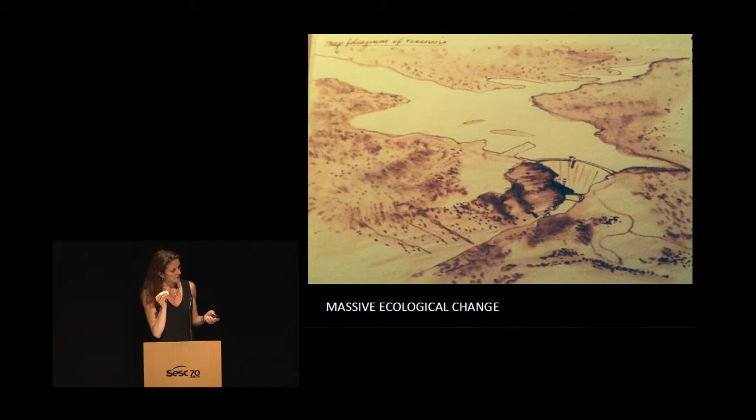An important aspect of the TVA is that water, landscape, and infrastructure have been an obsession of mine for years. When I was 14, my father, who was a geophysicist, took me on a field trip to this landscape in the Southwest. When I was at Harvard studying landscape architecture and architecture, I got a grant to go back and look at these large water impoundment structures, thinking about the ecologies and the differences between the landscapes on either side of these large dams.

A lot of my practice focuses on the term infrastructure. Infrastructure as a term developed in the World War II era, in reference to military logistical operations, largely through the work of General Eisenhower, who then became President of the United States. He was an important military general, and he created the federal highway system, investing $25 billion into our national highway defense system. It was very important that it was called the National Highway Defense System, because that was how he could get the political backing to make it happen.

One of the things that's very important to think about in relation to this is it transformed the distribution of people across the country. It was actually a very significant development scheme that really led to the development of the suburb, and a lot of this post-war development that we unfortunately see across the United States today.

Unfortunately, there are also representatives, congressmen and politicians, who still consider this about economic development.

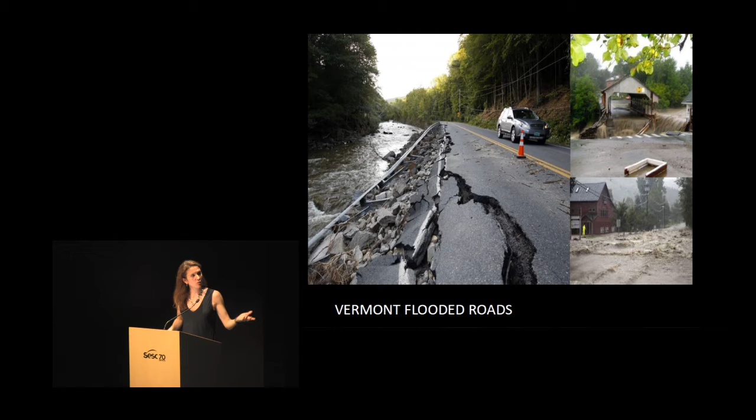One reason we think that's important is that I'm actually from Vermont originally, and a lot of our infrastructure is located adjacent to water systems. When it fails, we can have disastrous consequences. So I think we need to rethink how we consider infrastructure.

This is a competition we did for rethinking the whole urban structure of Montreal, but ultimately it's about thinking about the systems that created that city. We were asked to create a connection from the airport to the center of the city, and we decided to think about all of North American infrastructure.

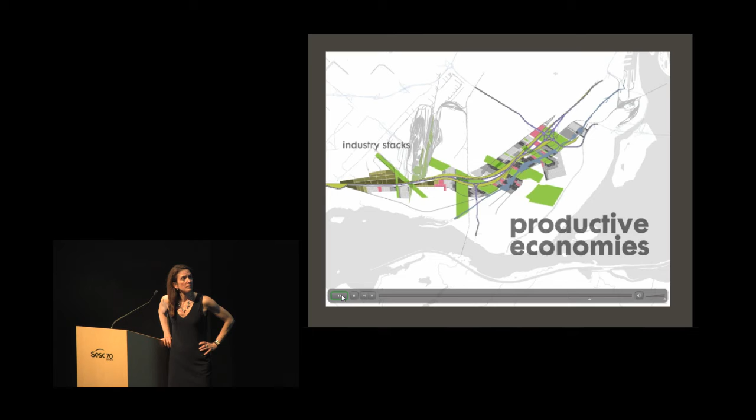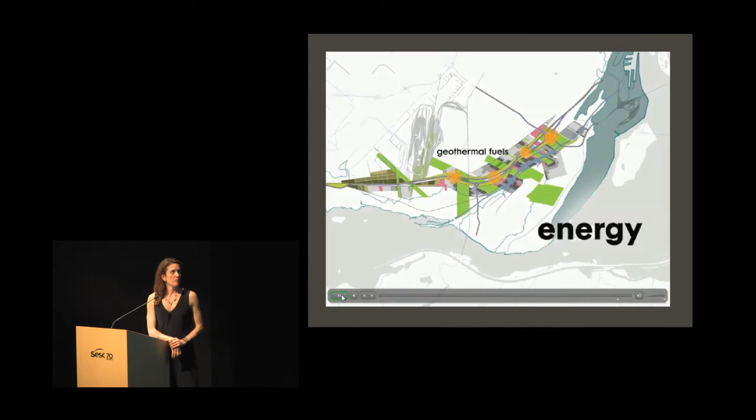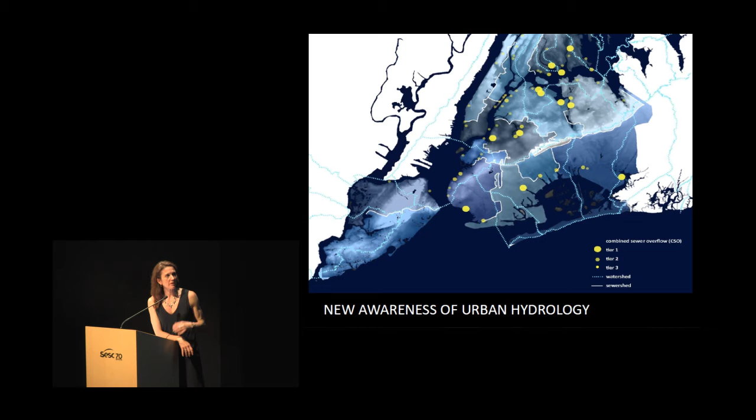We were trying to restitch the city back together with this project we called Infrasutures. It's relatively easy to do that in an animated cartoon, but now I'm going to show you how we've been doing that in New York City. I think there's a new awareness of urban hydrology.

I think that's happened in part because of the extreme climate impacts we've had from large storms, but it's also, happily, because of major changes from legislation signed by Richard Nixon.

In 1972, Nixon signed the Clean Water Act and the Clean Air Act, and he also created the Environmental Protection Agency, or EPA. Those agencies and acts have enabled a lot of the work that I do.

The other really important player in the work I do is Mayor Bloomberg, whose PlanYC proposal, a big document of guiding principles for the city of New York, helped inspire and motivate public agencies to pursue some of the projects I'm undertaking.

With that, I'm going to begin talking about some of my projects. There are 772 U.S. cities that have combined sewer systems.

Thomas Crapper did not invent the flush toilet, but he was a plumber who popularized it. Because he popularized the flush toilet, which used a lot of liquid, it ended up putting a lot of additional effluent into our sewer system. And so the combined sewer was born.

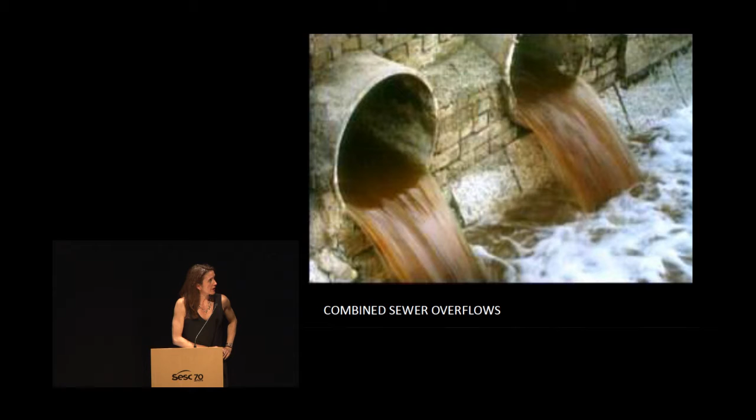Normally, sewage from domestic, commercial, and industrial sources is treated by a sewage treatment plant. But when too much water goes into the system during a wet weather event, the combined effluent goes into the waterways instead.

So what I'm trying to do with this first project is actually absorb that water. This project is called the Sponge Park, because we're using the landscape to absorb water.

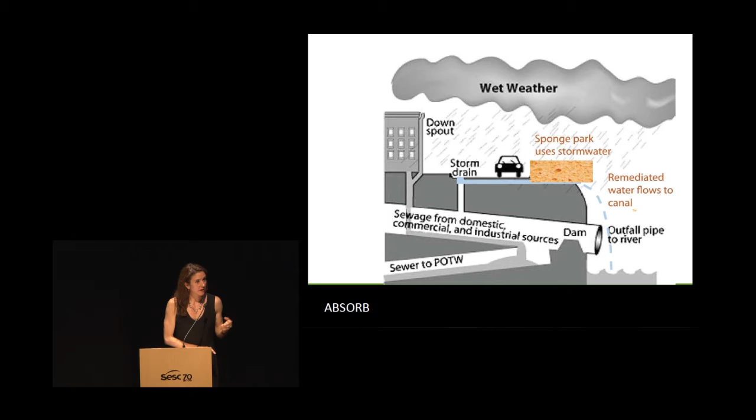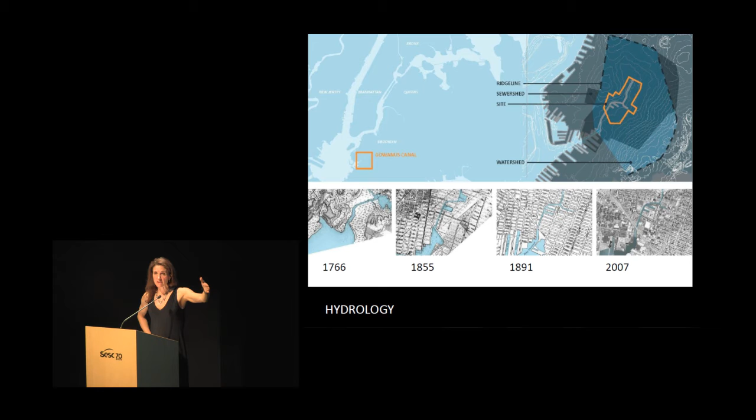So this project is in the Gowanus area of Brooklyn. Gowanus is now cool—it wasn't all that cool when I started. You can see that in 1766, the whole area was a swamp, and it was transformed over time into an industrial landscape, and now it's really a post-industrial landscape.

So what we want to do is bring back some of that absorptive quality of the swamp to what is now a very paved landscape, and create the Sponge Park.

So we work on a lot of global issues, but we do our work through small local pilot projects. In that way, we create replicable systems that, when replicated on a large basis, can have a big impact. We do the work in a unique way: applying for grant funding to get projects going, then creating the drawings, facilitating the construction, and even creating maintenance manuals for the long-term stewardship of the projects.

For the Sponge Park, it was entirely grant funded, and it was something the public agencies weren't excited about pursuing initially. But ultimately they kind of had to, because so many community people were for it, because we had raised all the money, and because it was a pilot project.

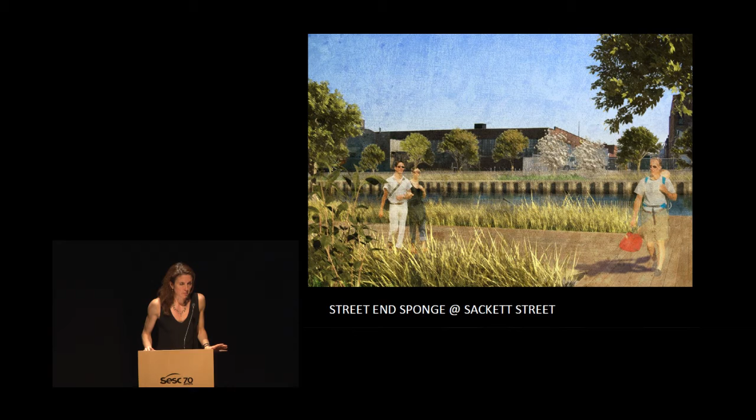That was very important for the boating community—believe it or not, there is a boating community on that cesspool. They wanted to be able to get out of their canoes at each of the street ends, so we left those open.

When you're working with an industrial site, one of the things that's significant is that the buildings often go all the way up to the water's edge. City planning during the Bloomberg administration liked to create waterfront esplanades, and they tended to be at the water's edge with a 40-foot setback from the water.

In that space, you were intended to have pathways, benches, and trees, but it didn't really say what do you do if you have a building in the way and it happens to be an industrial site. So what we did was rethink the idea of the waterfront esplanade and create what we called an urban promenade.

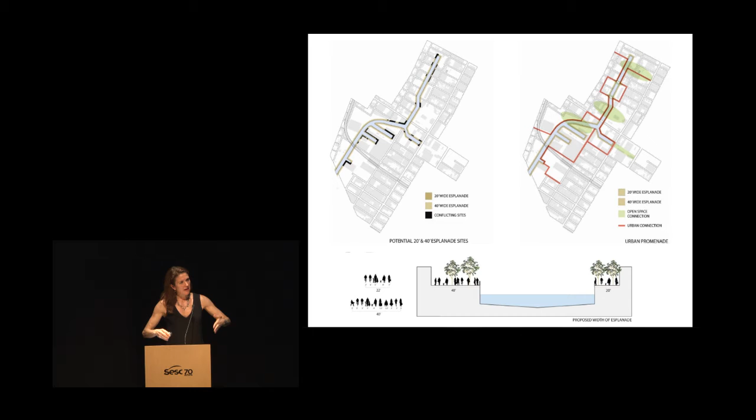We liked it because what it did was take the pathway and kind of knit it back into the community. So it doesn't just add value to the water's edge, it adds value to the entire neighborhood, creating an entire green district with these green infrastructure systems knitting into the urban fabric.

Here you can see how that could transform the neighborhood. We added about 6 acres of permeable ground and public open space to the city, not including the actual street beds, which would be these new, important public streets.

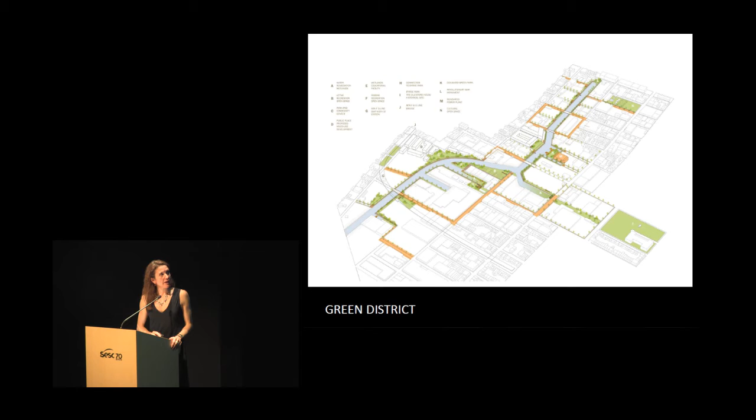One of the things I want to point out about working in the city is that it's really complicated—I know it's complicated here, it's complicated everywhere—but just to point out how complicated it is in this landscape: the sediment underneath the canal is controlled by the U.S. Army Corps of Engineers, but it became an EPA Superfund site in the middle of the design process.

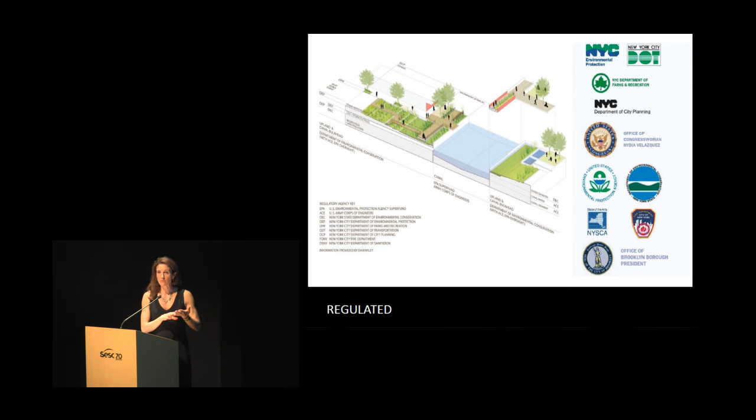The first 5 feet of soil underneath the upland area is controlled by the Department of Environmental Conservation, a state agency. The surface of the ground is controlled by the Department of Transportation because it's a road. Anything green is controlled by the Parks Department. And the water that flows over the ground is controlled by the Department of Environmental Protection. The shade over the water is controlled by the Department of Environmental Conservation.

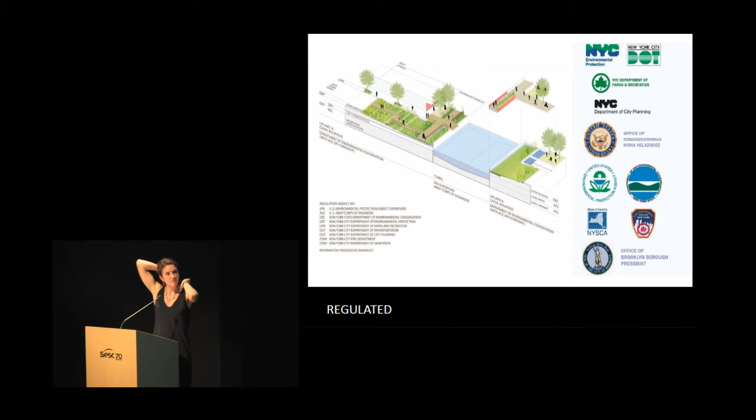City planning also regulates how many benches you have to have, how much shade you have to have. Sometimes the benches have to have backs. It's insane how regulated this environment is. I think there were something like 200 permits we had to get for this tiny little pilot project. And even within the Department of Environmental Protection, 14 agency heads had to sign off on our drawings. It was really insane.

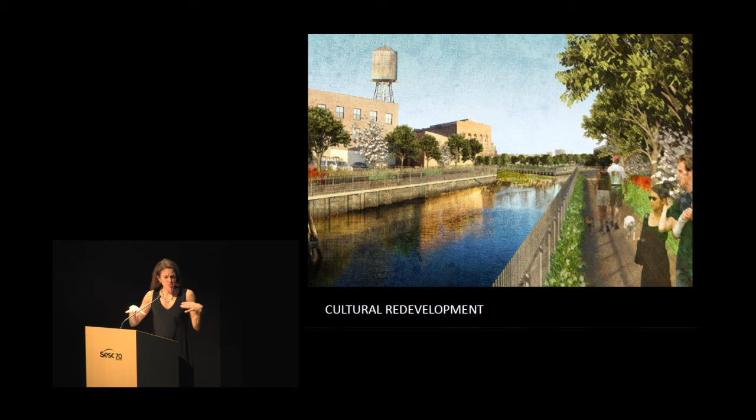But we're managing to get it done, and we're also working on a cultural redevelopment right across the way, which was part of our original master plan. So we're doing these pilots, and we're doing work for private entities to really transform this whole area. Now I want to talk a little bit about the pilot project for the street end.

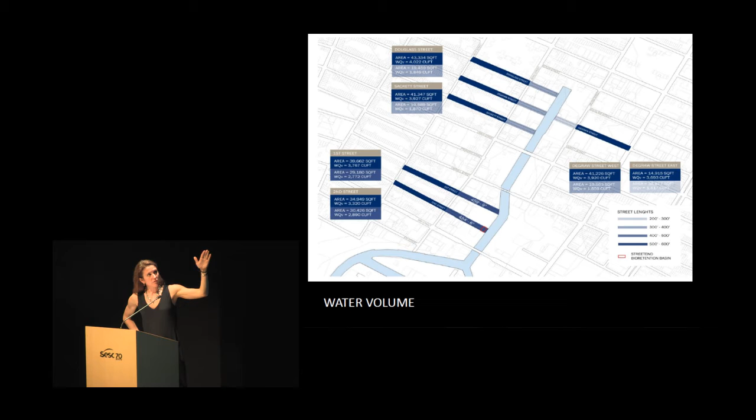So we calculated the amount of water going down to the street end. This is an animation of how it works, just a couple minutes, and it explains it most easily.

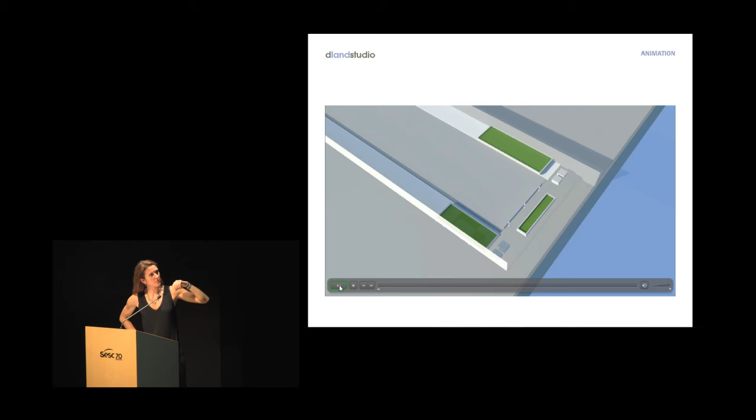So there were these existing planters, let's call them. They were called green streets at the end of the block. We're taking those out because those only took the water that fell into them. We added upland street swales, and we're also creating a system of bioretention cells. These are all precast concrete cells that are interconnected and planted, with very special engineered soils within them. There's an integrated sidewalk and sedimentation basin, and then a sand filter below a walkway, and then there's a drain.

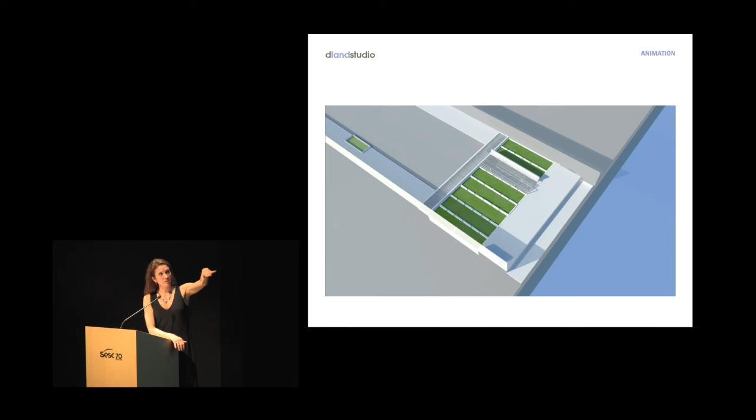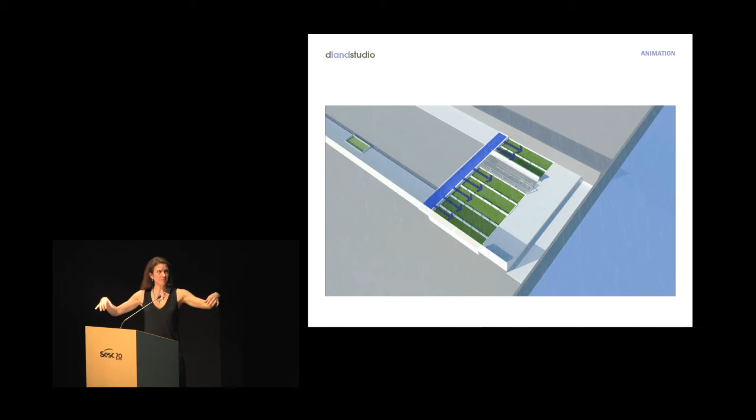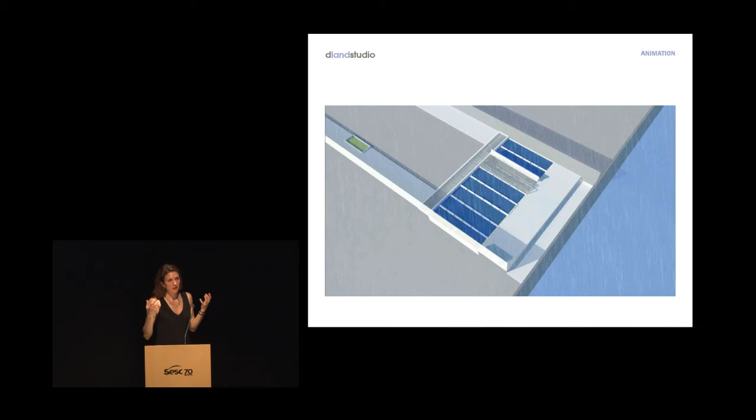So once it's gone through this whole filtration process, it goes into the Gowanus Canal. When the rain comes down, some of it is captured by the upland bioswales, and most of it is actually going into this sedimentation basin. That's really important because it takes out a lot of the fine silt. It's then distributed evenly to the cells, and when that reaches capacity, the plants absorb the water and the soil absorbs the water. If you get more than the 1.2-inch storm, which was the storm event we designed to, the water will go into the sand filter and eventually overflow into the canal, but that's after it's been cleaned.

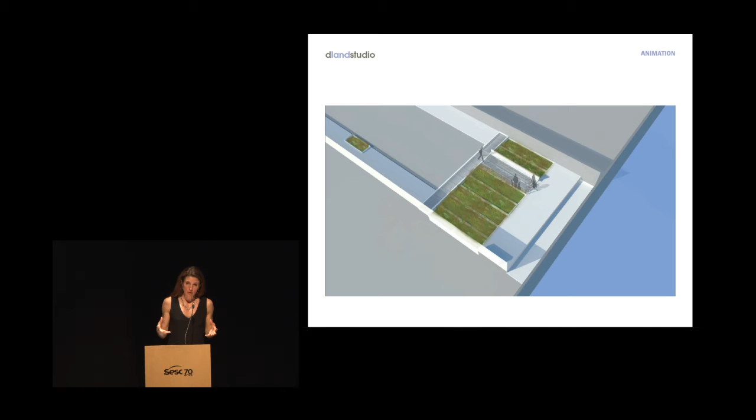So we used plants that have phytoremediative qualities. They can actually help break down the biological toxins in the soil, and they can also help absorb some of the heavy metals in the soil. We had specific plants that were designed, or selected, to do that, and it would create this whole new open space.

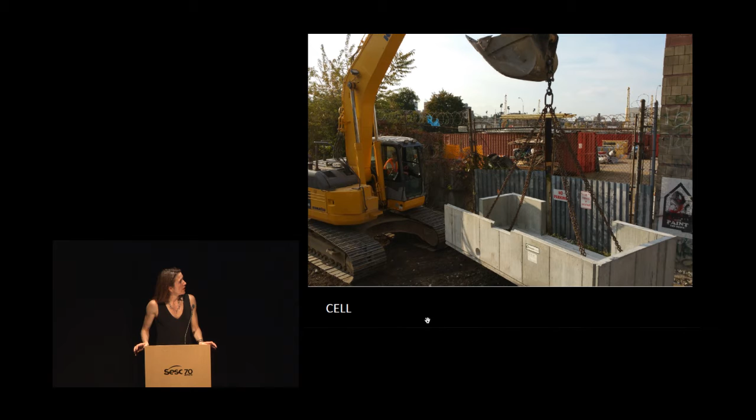So this is it in construction. You can see these cells are huge, it was really cool. We'll just go through these quick - here they are going in. We ended up taking out the walls in between them because we didn't need it, it was just extra material.

We're really excited because this actually captures 2 million gallons of stormwater every year, so it could really have an incredible impact. The Department of Transportation and the Department of City Planning are now looking at implementing this everywhere in New York City for every street end. So we've subverted the system, we've sort of worked around every agency, we've managed to get all of their approvals, and now we've created a new form of urban infrastructure for New York.

So architects can infiltrate the engineering community, right? We have the potential. It just takes a lot of time - I joke that it took 8 years of planning and 8 weeks to build.

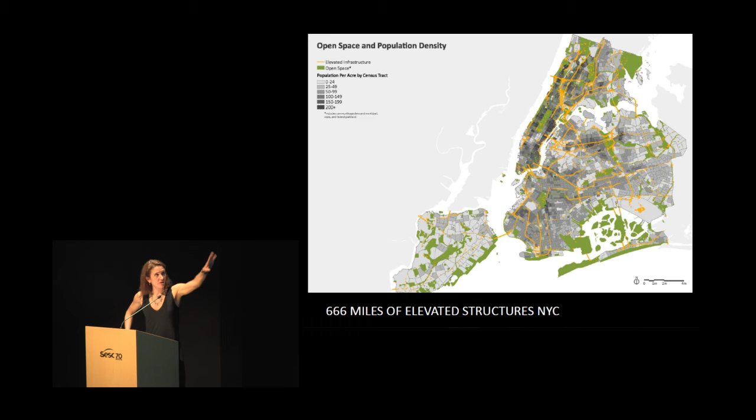Two years ago, I was the Design Trust's Urban Design Fellow, and we looked at these 666 miles and came up with a number of different typologies for how to transform these existing elevated structures.

We looked for geographic distribution across New York City, and then also looked for typological strategies—basically different operations for different types of things that could happen.

Clover was more of an ecological approach for the large cloverleaf, whereas Landing was really about the threshold to Chinatown. The Train project really had a lot to do with noise and managing those consequences. With Cluster, we had so many different forms of infrastructure coming together that a lot of the project had to do with wayfinding—how to make place out of this really disjointed area.

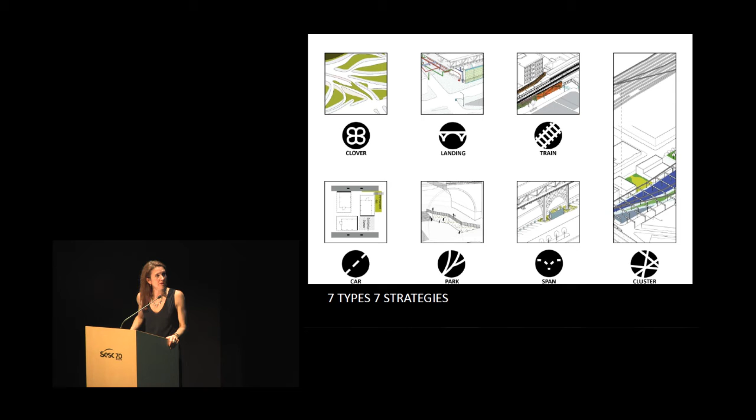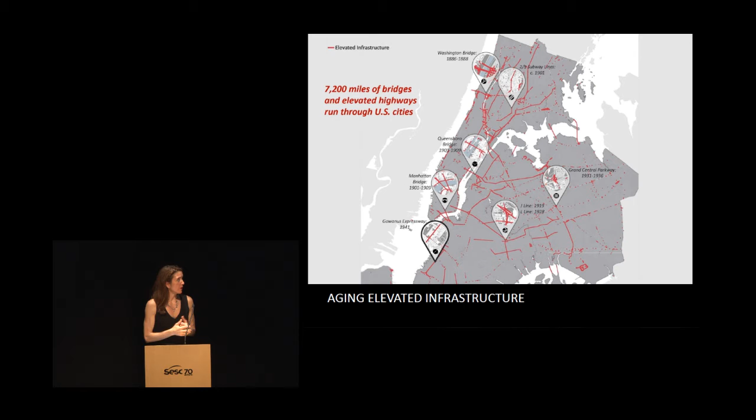We also looked at the age of the infrastructure, because that might help us prioritize where the public agencies might want to put their money and how they might want to figure out where they were going to operate first.

On the Gowanus Expressway, we had a particular opportunity of a very large highway next to an area becoming a new, exciting technology center. But it's also fairly close to the Gowanus, which is developing as more of a residential neighborhood, and it's displacing some of the light industry and art studios that exist there. So we felt a need, and we saw space.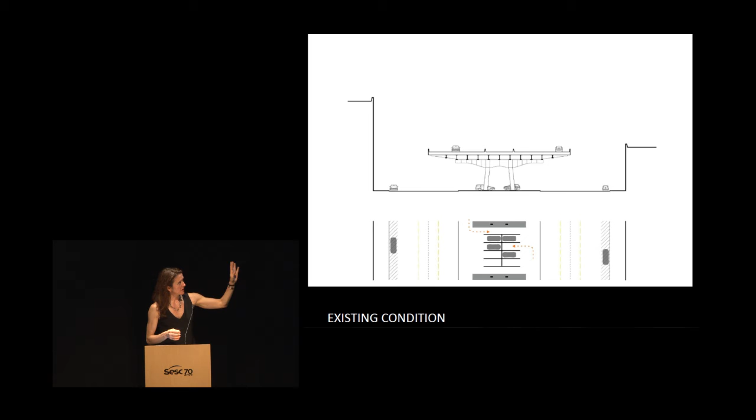So we thought, why not take the parking away from underneath this huge elevated structure, and maybe put in some green infrastructure, taking the water off of the raised highways—something I had developed in a prior project—and then also think about how this space could be used for light industry.

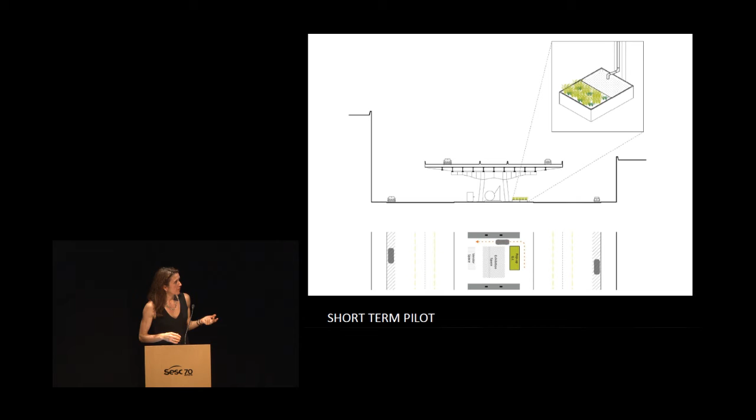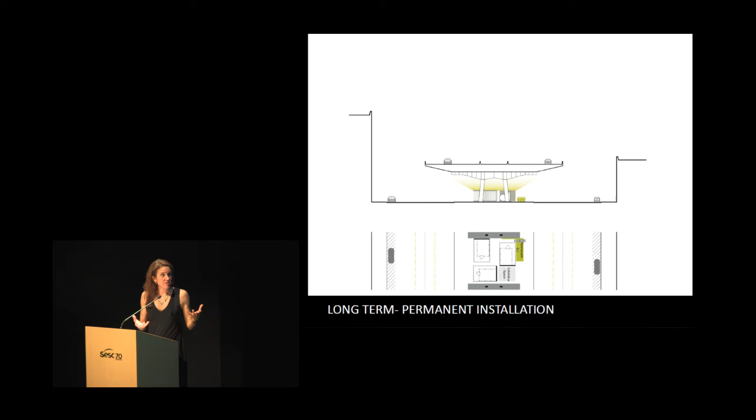It could be used for artist studios. It could be used for things where you have to make noise and make mess. And then it might have a longer-term life as a permanent installation with studios or even gallery space existing underneath the highway, because we have these adjacent uses of this industrial space that's becoming this new technology and art space right next door.

This is just an illustration of that under-the-elevated reclaiming of public space.

Over at Broadway Junction, which is one of the cluster projects that I talked about, what we were thinking about is how to really transform this space. There's a lot of space and it's quite beautiful with this very filtered light, but right now there's nowhere to occupy and you can't really tell where you're going.

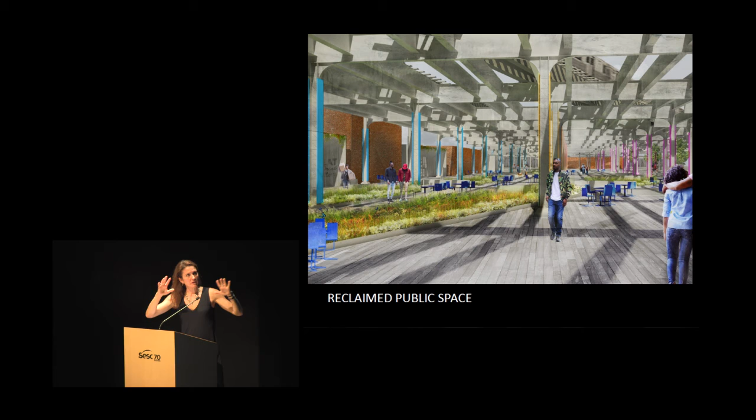So we thought about some of the strategies we could use to help understand what direction you're going in, using color, and how we could actually bring in some more green space and some more seating.

One of the big issues I was exploring—probably the reason I was chosen as the Design Trust Fellow—was that I was looking at the water that comes off of the raised highways. You can see this is the problem: this is not a natural water body, it's just a really large puddle, and there's nowhere for it to go. It's really kind of toxic water.

So what I want to do is actually take the water and put it into what we called a Holds scupper. There are these downspouts that come off the raised highways, and the water has nowhere to go. In some places, there aren't even catch basins.

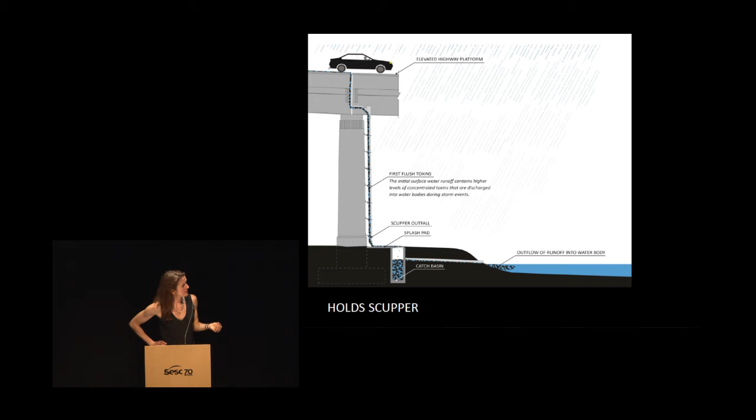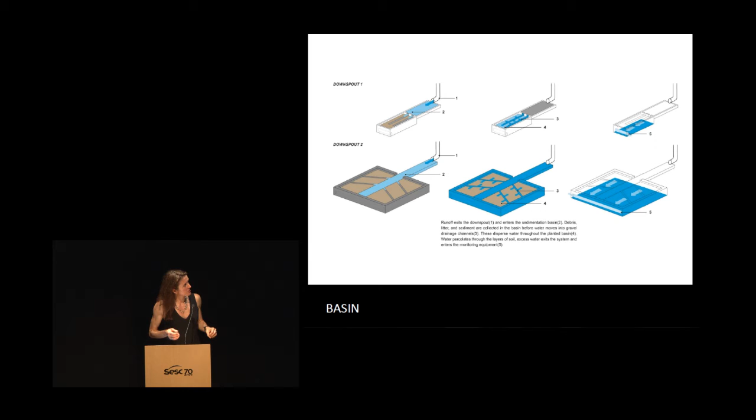So we developed a number of different typologies, and these are a couple: one is a sort of cellular technology using concrete, and this other one was made of gabions. In each case, there's a sedimentation basin, and what it amounts to is a large planting area.

But happily, there were some landscape architects on their staff who said, just let her try it. It's a pilot, we can always turn it back. And because of that, they let us try it, and it's actually working.

But unfortunately, when you create nature in the city, you create nature in the city. You create good habitat. And this muskrat moved into our green infrastructure system, our hold system.

And he moved into this big area that we had, it was a big concrete sort of cell that we had for monitoring each of the projects. For the Sponge Park and these hold projects, we're monitoring how much water goes in, how much water comes out, and then how clean it is going in or how dirty it is going in, and hopefully how clean it is coming out.

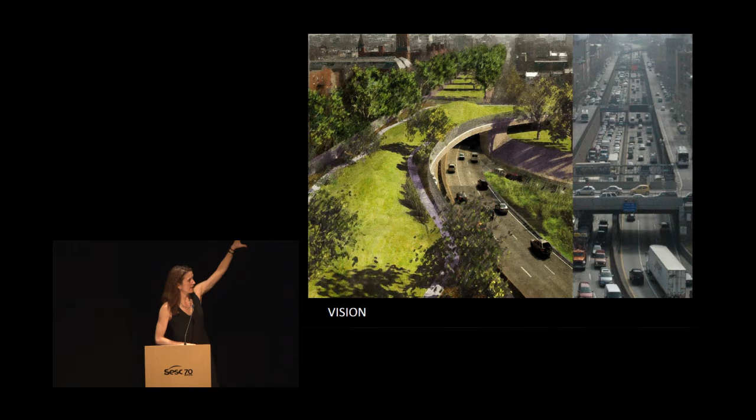And my vision when I started my firm had to do with Robert Moses's work on the Brooklyn-Queens Expressway, and trying to ameliorate some of those impacts by creating a large park in Cobble Hill and Carroll Gardens.

So I got a grant to look at this, and I studied the economics of even putting in, say, 350 trees, which I discovered would create a $50 million gain over 10 years in terms of pollution control, water recycling, and shade value.

And this was at a time when people weren't really talking about the value of landscape, or they'd only just started to visualize and quantify these things. We found this Forest Service document that had done this study and gave us the data, but it wasn't out there in the public realm. I'm happy to say that 10 years later, this kind of message is starting to permeate more of popular culture.

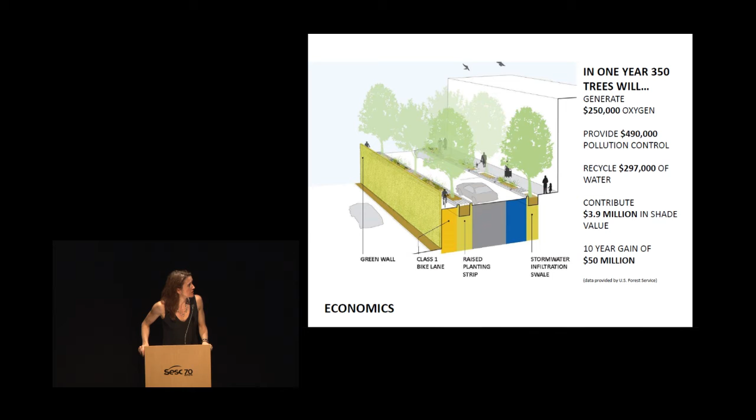But, back to Robert Moses. Some of the things that Robert Moses did early on were very good in terms of creating lots of playgrounds and open spaces for people of all economic brackets.

And oftentimes he would go into communities and present these beautiful parkways with park space on either side.

And these trenches actually create these physical boundaries. He not only created these highways going through, but also a lot of the bridges that touch down in the neighborhoods, all in the name of progress.

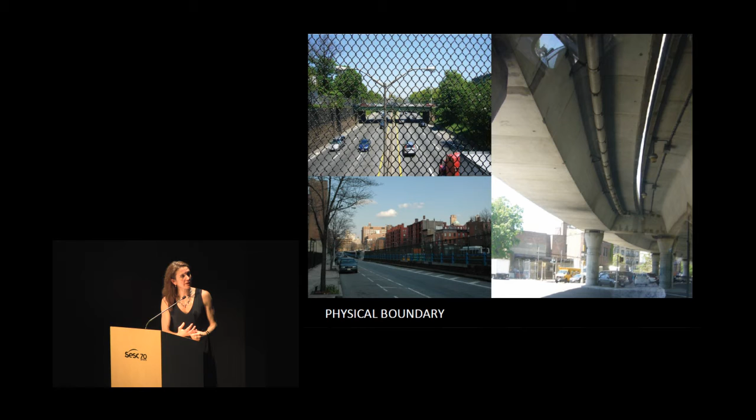So when I started, I was working in Cobble Hill and Carroll Gardens, which is on the bottom part of the slide.

And then that work got the attention of a councilwoman, Diana Reyna, who hired us to do a project in Southside Williamsburg, which is a primarily Latino neighborhood up in the northern part of Brooklyn.

So it's an area that's plagued, unfortunately, by gang violence, and the trench actually creates a territory between the Dominican gangs and the Puerto Rican gangs.

It's also an active recreation desert. You have to go pretty far to get to playing fields for your teenage kids. Thus, the teenagers end up in the gangs.

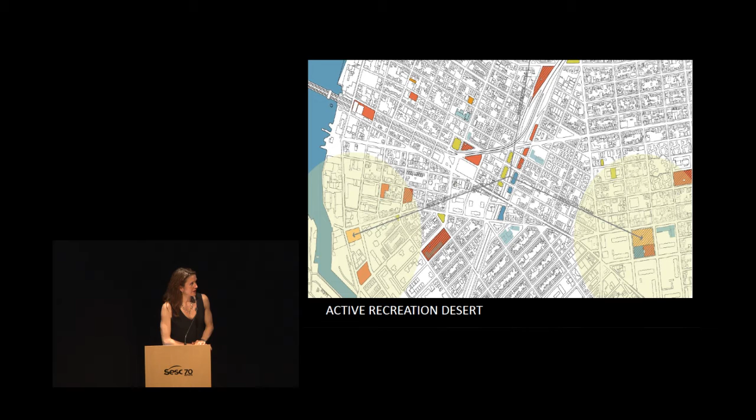And so we went through a very extensive community engagement process to develop a program for this park. This is Diana Reyna at one of the community meetings.

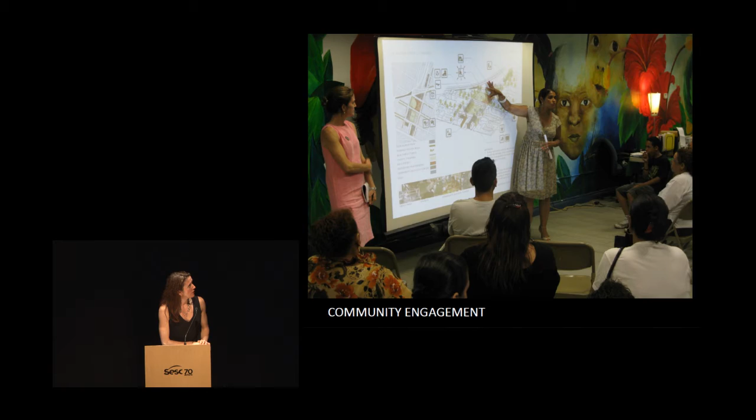What the community told us was that they really wanted playing fields. So we ended up designing a baseball field and then a flexible area that could be a soccer field between the two fields, or if you used both fields. Then some more lush landscapes on either side, and we kept some basketball courts and some play areas, creating this whole kind of verdant cap for the highway.

This is done in lots of parts of the world, but it's been kind of hard to get it done in New York City because it takes a lot of political will to make something like this happen, and the political will tends to happen in more affluent neighborhoods, not in Southside Williamsburg. But we're trying, and so we looked at the feasibility of this in terms of the spans.

What we discovered was that we needed to keep the deck actually fairly thin. So the program we had proposed, putting the field turf over the center portion, was actually ideal because it doesn't have a lot of weight, and so we could keep the structure fairly thin. Then in those zones, we could touch down in the center with an intermediate structure, which meant we also didn't need such a thick structure.

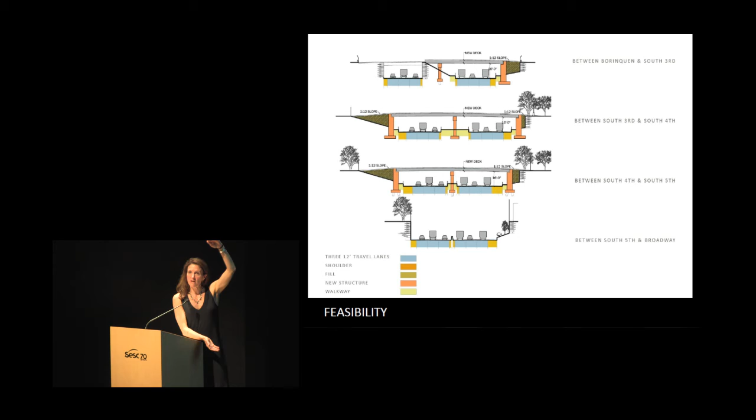This was important because we had to bring the project up to federal highway standards, so we needed 16 feet of clearance. We also looked at the construction of the BQE and saw it was done in phases, and we recognized that this section of the BQE was built in 1950. Now, these highways generally have about a 50-year lifespan, so it's time to rebuild a number of the bridges.

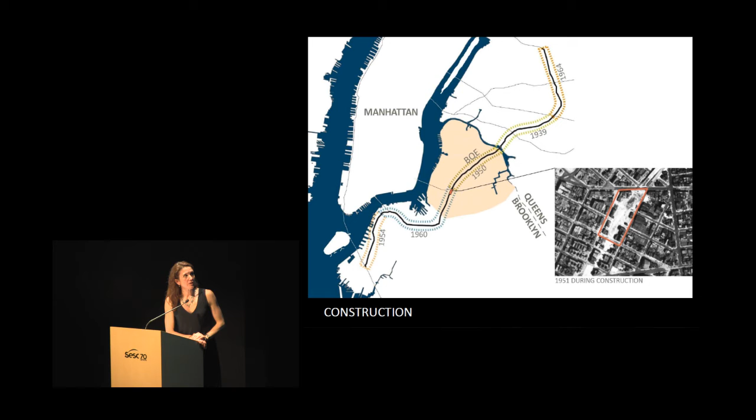So we thought we could create an enabled economy. Basically, each of these bridges costs about $10 million to rebuild, so we thought we could rebuild those bridges, each for $10 million, a $30 million city investment, and then use that to leverage against a $70 million federal, state, or private grant fund. So that was our idea for this enabled economy as a way to make this happen.

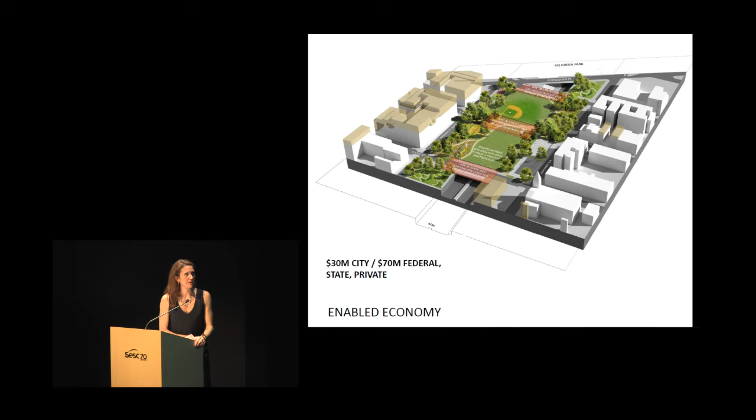So we'd turn this passive open space into a more active component of the community. There are 20,000 miles of rail trails in the United States, and the Queensway is adding another 3.5 miles. This is a project we're about to start, but the work I'm going to show you is from a feasibility study we did in partnership with WXY, an urban design firm, two years ago.

We did this work for the Trust for Public Land and an organization called the Friends of the Queensway. We're adding 40 acres, actually 47 acres, of new park space to New York City along this 3.5 mile long linear park.

So the park has a lot of different characteristics along its length. On the northern part, we're creating something we call the clearing. Then we have these areas we call passages, because they're houses very close to the Queensway, and we want those to be places people might move more quickly through. Like if you're on your bike or jogging, we don't want people to linger there, so there isn't a lot of program space in those zones.

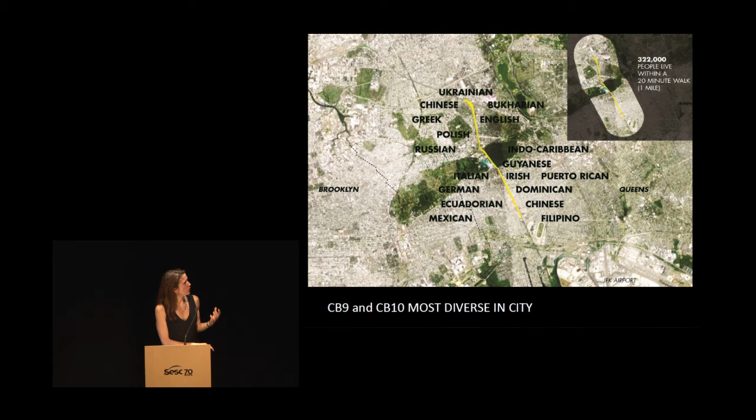So we looked at different programs that could exist along the Queensway and what was possible, and we had a whole series of community meetings to come up with this program.

Then we also really looked at the existing conditions, and you can see that it's very different. On the top part, it's kind of on a mound, and in the middle, it seems like it's in a ravine, and then on the bottom, it's in a structure.

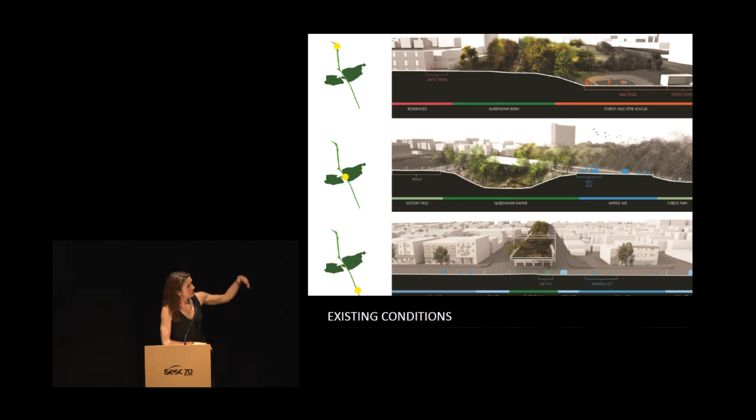Part of the reason that exists is that the center part, the ravine part, is where the train actually cut through the terminal moraine of the Wisconsin glaciers. So there's a geologic element that the technology actually pierced through. We're using that as part of the design inspiration for the material qualities of the site, and I'll explain that in a few minutes.

But the other thing that we're thinking about in relation to these material qualities and the physical design of the space, and how to make it more beautiful and functional, is that there are these huge, gorgeous trees, and we're going to keep them.

There's a lot of understory that has poison ivy and not nice ground cover landscape. So we're going to try to clear a lot of that out and clear out the invasive non-native species, add seating in places where you might have shade but you're adjacent to the Little League field, and then also add these moments where you might have a blast of color seasonally. So there'd be a reason or a moment that you'd want to visit.

And then in the southern portion, really thinking about how this can be a public space that can be used by everybody. It can be used by the workers in the area for lunch, or it can be used by some of the adjacent schools who don't have any open space at their schools.

And the Board of Ed requires that the teachers walk them around the block so that they get the required exercise for the day. It's really sad. So this could be a new resource for that community.

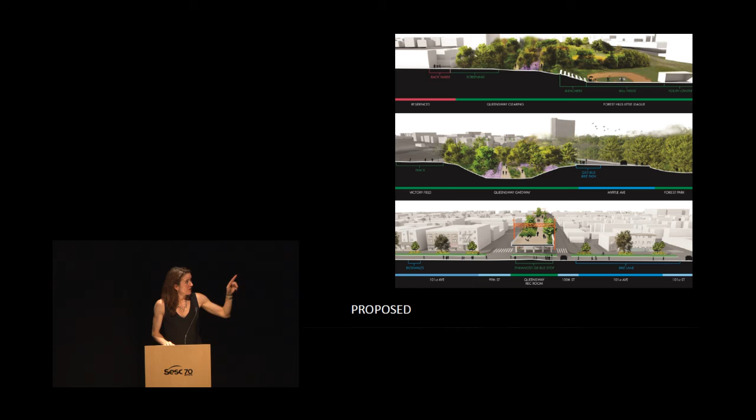So this is the existing condition in the northern part. That earth mover is not actually doing anything. It just was there, which was kind of funny.

This is our idea of transformation of this space. You can see we created these stone walls, and part of that is a glacial reference, thinking about the glacial till that was left behind when the glaciers retreated. Part of it is a cultural reference, because the early Dutch farms that were in the area created walls to define their farm boundaries using those same stones. So we want to start to draw that out.

And then we also have a really significant functional problem in this area of stormwater management. So we're going to create this new water body, which is actually a stormwater management landscape.

We're going to capitalize on the neglect. We have these huge trees, so we're going to keep them, so we have this nice shady area to watch the ball game.

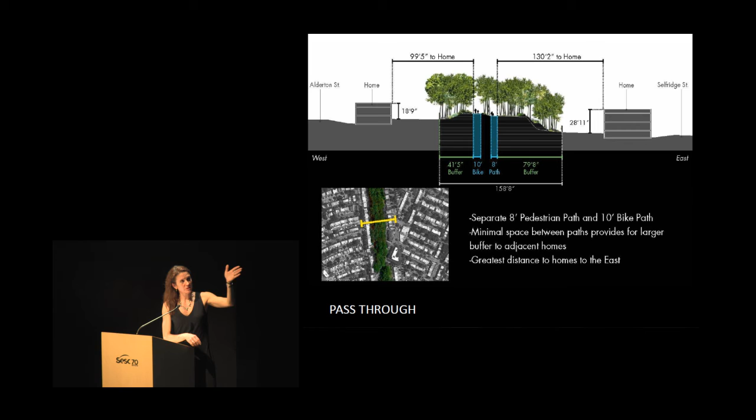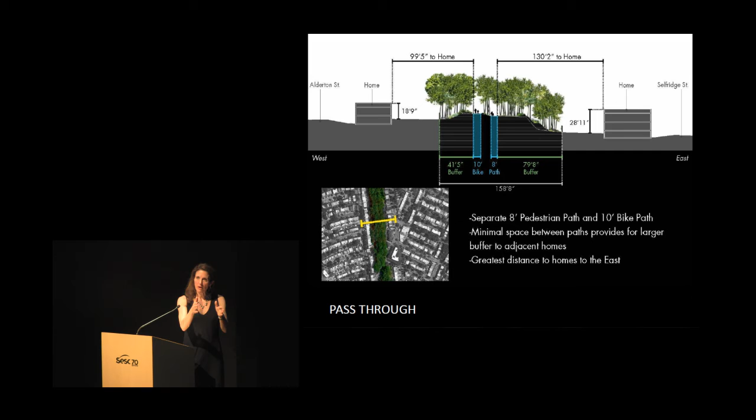And then, as I said, create these pass-through zones. We spent a lot of time designing this pathway so that we could be far enough from the houses to enable privacy, but have it so that you would still feel safe when you were on the path. One of the things that was significant we noticed was that some buildings were parallel to the Queensway and some were perpendicular. So we had the path closer to the buildings that were perpendicular so that fewer houses were actually impacted by the pathway going through the site.

It's just a little thing, but it's what we do as designers, right?

So we tried to accentuate the site to create better year-round use of Forest Park, adding some of these understory elements and creating a new access point down from what's called Victory Field, which is an athletic field.

And then also created educational opportunities with these learning landscapes, these outdoor classrooms that could exist along the trail.

To create this new urban greenway for, as we like to say, real New Yorkers. But hopefully tourists will visit too.

So 40% of the world's population lives within 100 kilometers of the coast.

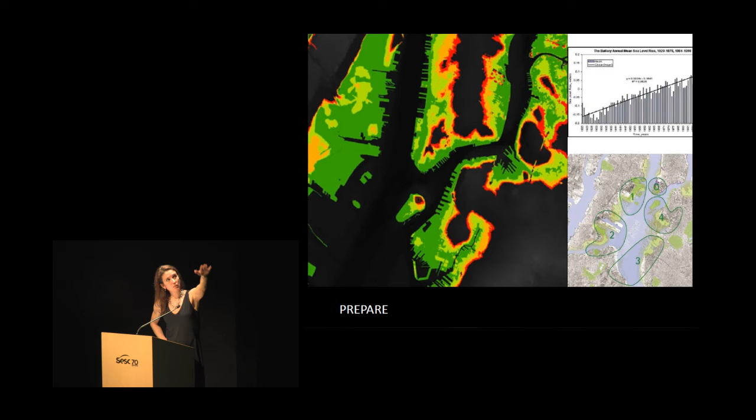In 2010, we were participants in an exhibition at the Museum of Modern Art, partnered with Architecture Research Office. We were tasked with preparing for sea level rise in New York City. That graph shows the level of sea level rise based on rapid ice cap melt, assuming 6 feet of sea level rise and a potential 18-foot storm surge. You can see that in this map of the green. My team was asked to look at Lower Manhattan.

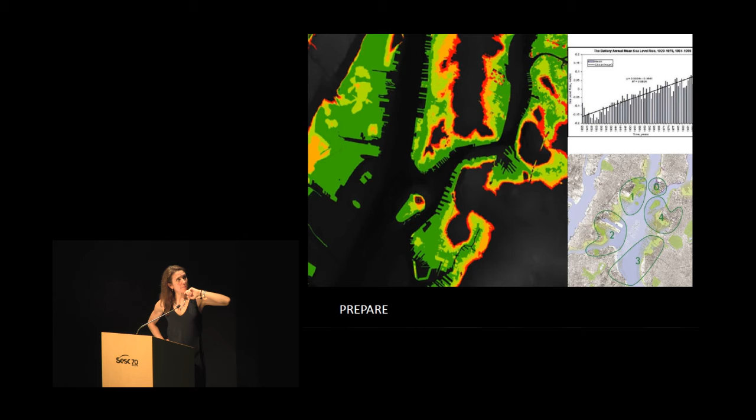But with the advent of containerized shipping, by 2010, all that shipping had gone out of New York City proper, and the highest and best use of the land was for recreation and residential use. During the Bloomberg administration, there was a huge push to build more residential properties all along the waterfront, not just in Lower Manhattan.

If you look at the value at risk, this is a map of 6 feet of sea level rise and an 18-foot Category 2 storm surge. You can see that 1625 water line keeps coming back. So if we just go back to that 1625 water line, we're all set. But we have a lot of valuable real estate in between, so we need to make some changes.

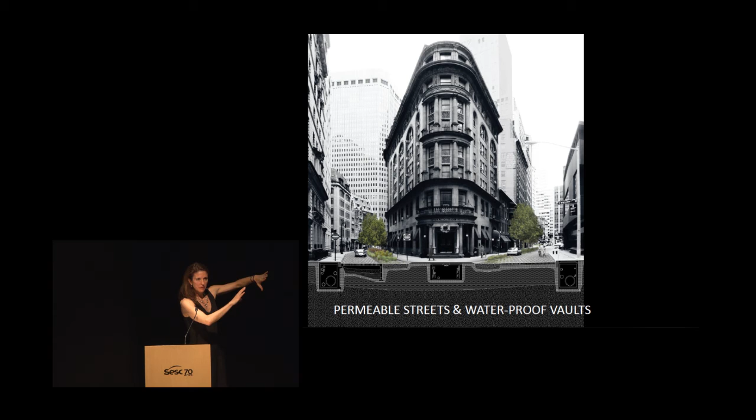I put the public utilities on one side of the sidewalk and the private utilities on the other side. Clearly you'd have to figure this all out, but what that did was unlock 27% of the city to become permeable, so you're making this whole new permeable ground that can absorb all the surface water runoff.

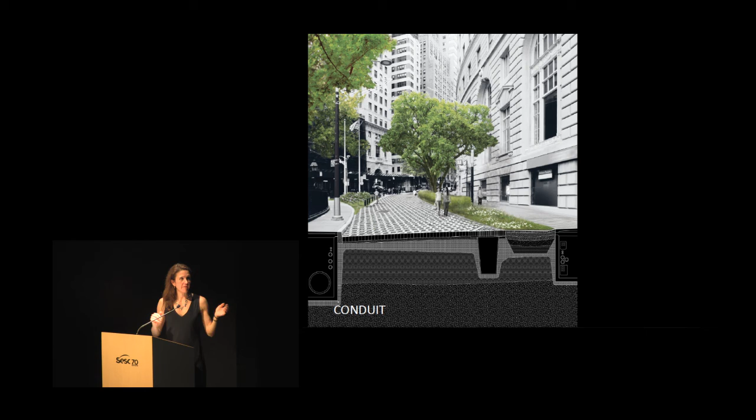Then we created these level 2 streets for distribution and collection, so these could hold more water. An important part of this was that the infrastructure under the sidewalk could be accessed by vaults, so if it ever broke or became obsolete, you could just replace it without having to rip up the street.

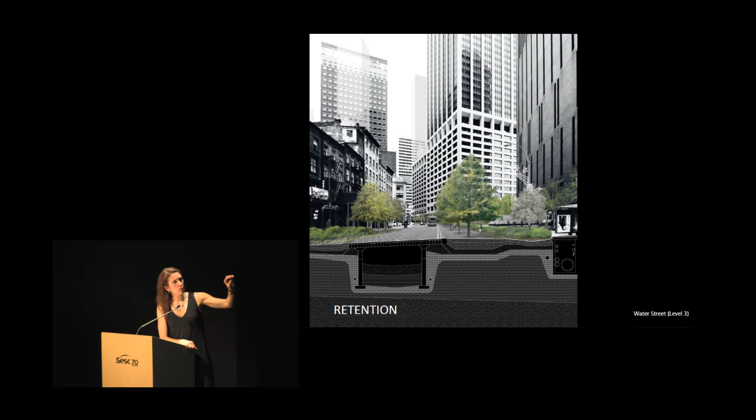We had level 3 streets for retention. If you had a big flood, this is where a lot of that water would go, so these would both protect and also hold a lot of water. This is something we're now doing—we're redesigning 25 blocks of New Orleans, and we're actually creating these kinds of landscapes for the St. Roch neighborhood.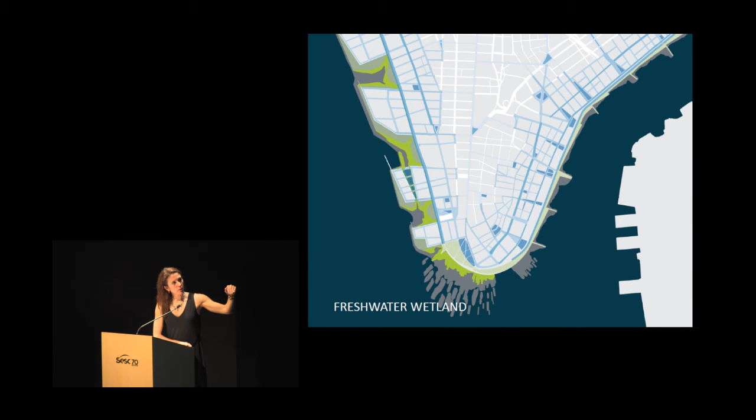This whole system creates a whole porous green street system. We added this new 6-foot hardened edge, then a series of waterfront parks, freshwater wetlands, and salt marshes along the edge, all to manage different types of stormwater, to create an entire resilient system.

This is it along the Hudson River—we call this the Hudson River Urban Estuary. You can see how this creates a new kind of edge for Manhattan. It's a crenellated edge that has blocks of development and blocks of protective wetland or protective open space. You can see how you could have small boat craft and have the water actually integrating into the urban fabric.

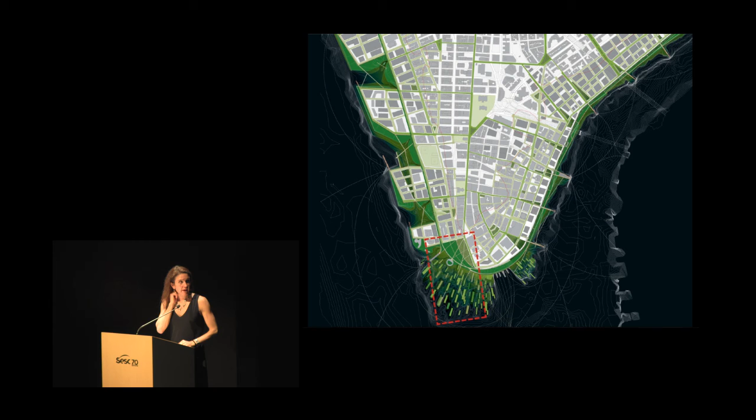Down on the Battery, we had what we called the Battery breakwater. The Battery breakwater also allows for small craft, and it would sort of develop over time in the shallows, as a protective landscape.

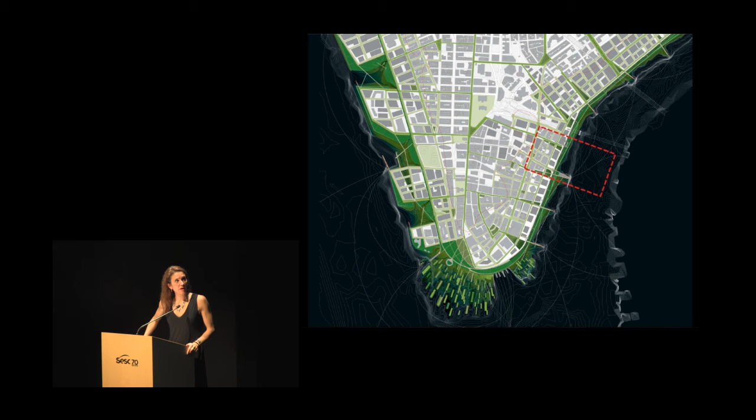And then over on the east side, we had what we called the East River Esker and breakwater. We had a large mound that would create this protective barrier.

And in this East River estuary, you'd have these walkways that could go out over that landscape. And then also these sponge slips, which were upland areas in the former slip spaces where ships used to exchange goods. But here it would be a place of ecological exchange.

We used plants that could withstand periodic inundation from saltwater, so they could get flooded and then be okay and become public open spaces again in fairly short order after a storm, to create this new resilient city.

Now, after we did this, we started looking at global models for how this might work. We thought about how you have reef ecologies in certain areas, mangrove ecologies, maritime forest ecologies, because you can't use the same ecological system for different regions, right? It doesn't work. So you have to think about what your strategies are, what your materials are, how you can operate.

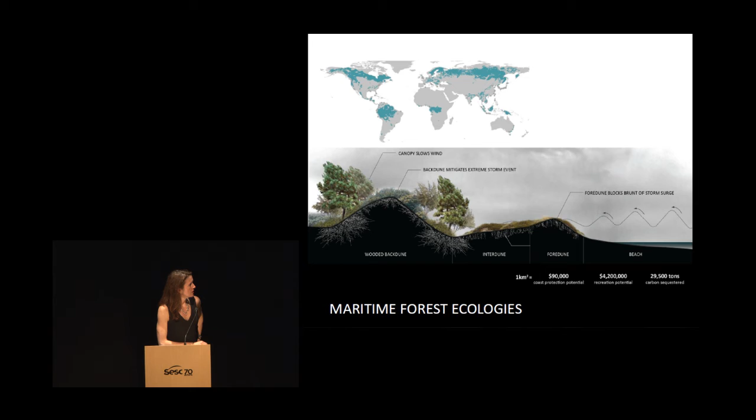And then we developed these different typologies for different areas, from basically the Brooklyn Navy Yard to Shanghai to Miami, and then some of the informal settlements of Bangladesh.

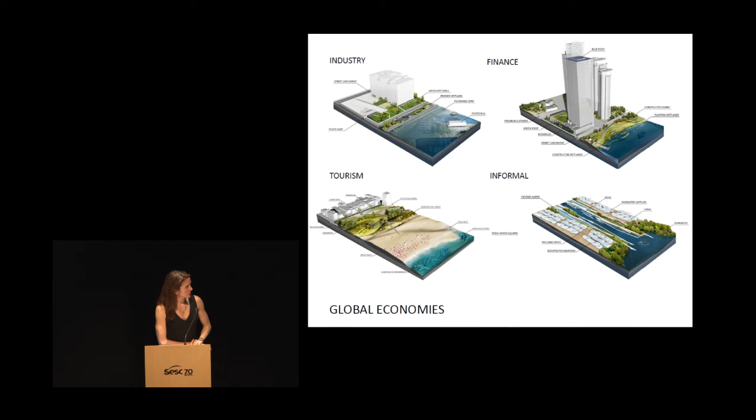And one of the things that we were looking at in Miami was this tourist economy and how it could be impacted so greatly in Miami Beach. Now people are paying a lot of attention to this.

Because it's a quite scary situation, because the whole city is sitting on limestone, and you have the saltwater meeting potentially the freshwater aquifer of the Everglades, and there's very little topography that's actually dividing those two systems. So something has to be done to keep them separate, or we're going to have a kind of ecological disaster which will destroy that economy.

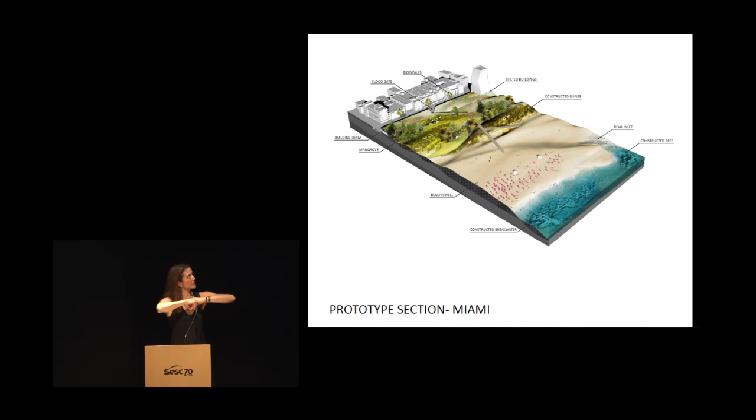So we were looking at some ideas for how landscape might help with that, with the creation of this new topography that'll use that mangrove ecology.

And another area that was a little bit terrifying, given all the political strife globally, is the Nile River Delta, which is really the breadbasket for an entire region. And as that area becomes smaller and smaller, you're basically going to have a population that's going to have to find a new food source, because a third of the delta is going to be inundated with saltwater over the next 30 years.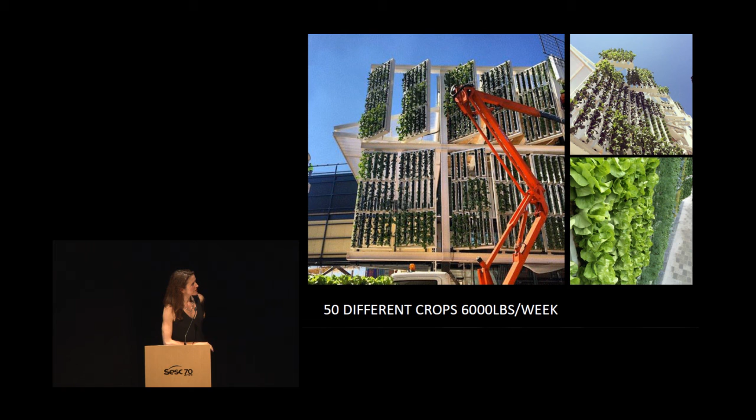And it also created this really beautiful effect on the inside. We used a system developed by an agronomist from the University of Wyoming called a zip grow system, and we integrated all of the irrigation. It's a hydroponic system, and we integrated that into the structure so you didn't see any pipes or anything. It was very seamless.

And here you can see the effect of the wall. We used all these heritage seeds and 50 different kinds of vegetables and fruits.

I just want to give credit — this is the second to last slide. So this is the guy, Nate Storey, from Bright Agritech, and he told me a really funny story. Well, there are two stories. One, he took me to a greenhouse owned by this guy named Hayden Christensen — Hayden's this young kid, and he has a greenhouse, and he's actually making a living out of it in the suburbs of Denver. What he does is use one of these towers, grows the food on the towers, puts them on these bases, and brings them to Whole Foods.

Apparently about 60% of the cost of produce production is in packaging, so he basically eliminates 60% of his overhead by using this system and bringing these things to Whole Foods. And you can go and clip your kale right off the tower, so it's as fresh as it could be. It's kind of a wonderful idea.